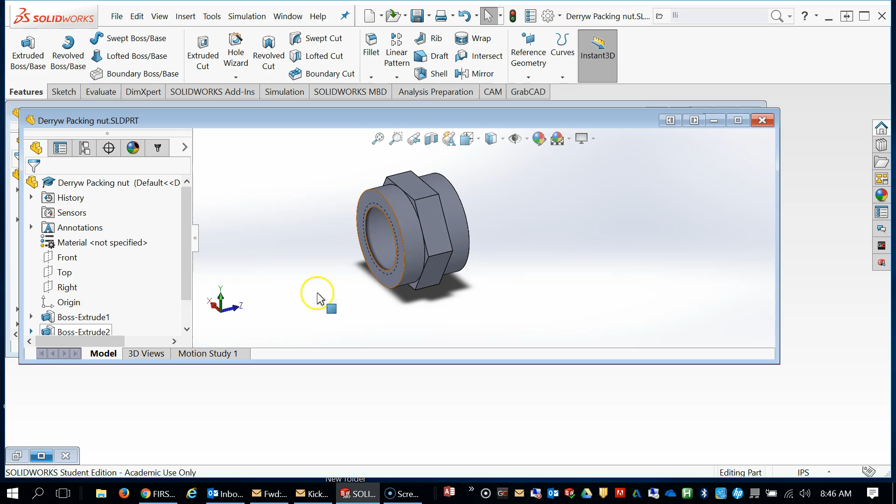But before we do so, I want to change the materials of our parts. So I have our part open here, and you'll notice that the material is not specified. We're going to right click here, go to Edit Material, and close up.

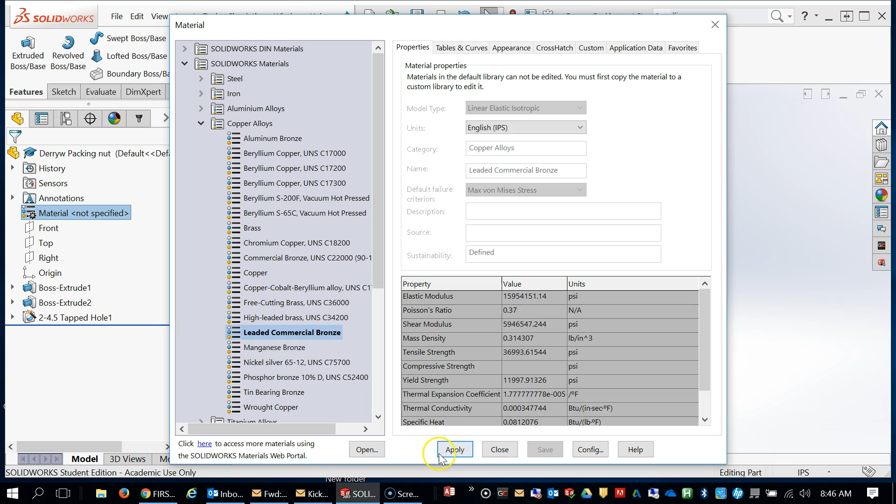Steel is probably open for you, the default. We're going to close that up and go to the copper alloys, and down here we're going to select leaded bronze. If you don't select the correct material, your mass properties are not going to match mine. So take a moment, make sure that you select leaded commercial bronze, and hit apply.

You'll notice that the color of your part changes. I'm going to go ahead and hit save and close this guy out. You'll see that I've already done that to the other parts. You're going to need to go through each of those parts and change them to leaded bronze.

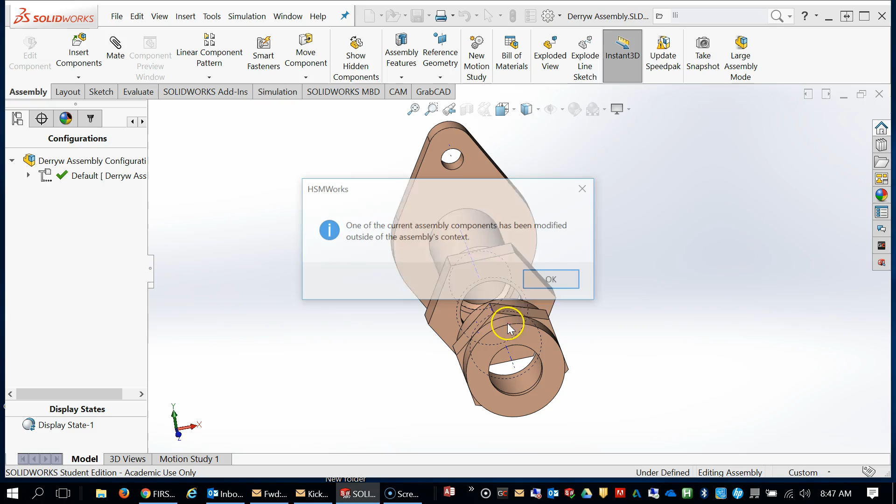I'm going to open up the assembly just so you see what happens. If there's been changes, you're going to need to hit rebuild, and it's going to make sure that all of your parts now have the correct properties.

So once we've changed the properties on our parts, we're ready to begin putting them on a sheet. We're going to go to New, select our midterm template. You're going to need to get that template. I'll set you up during class.

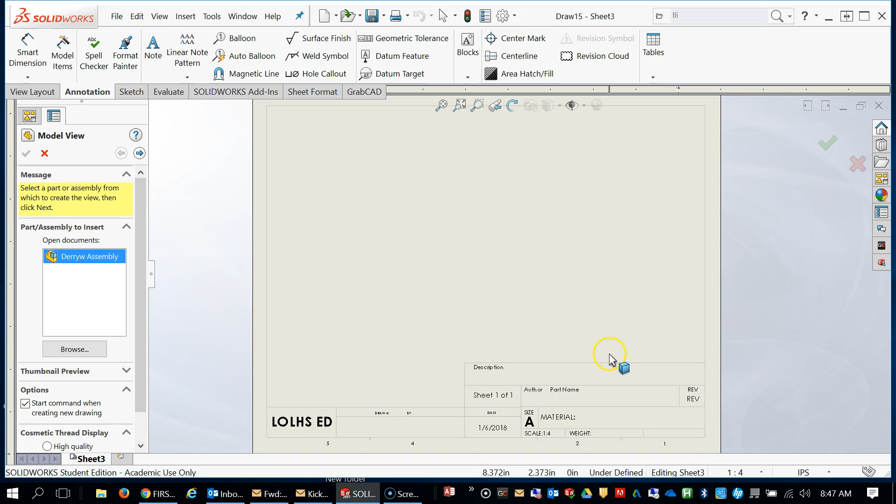I'm going to close this out because I like to use this method for pulling in our parts. It's easier to see what they're going to look like ahead of time. I'm going to go with the assembly first. We'll get a preview down here, and we're going to select the isometric view.

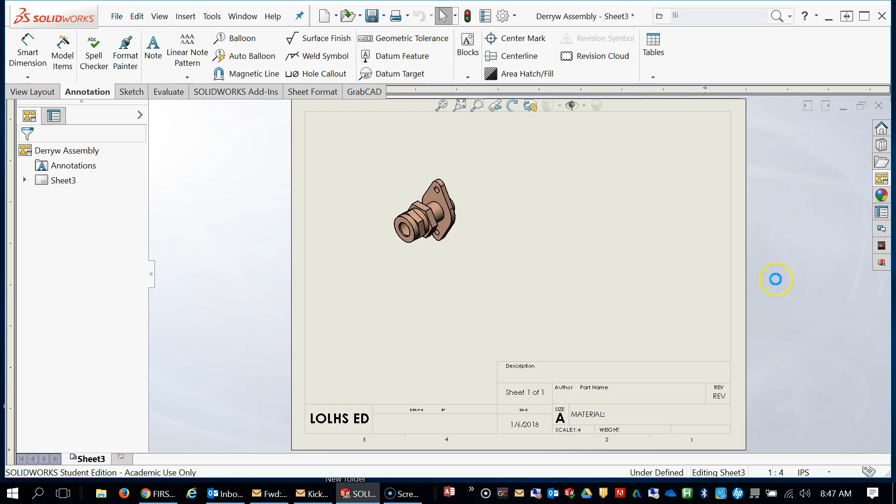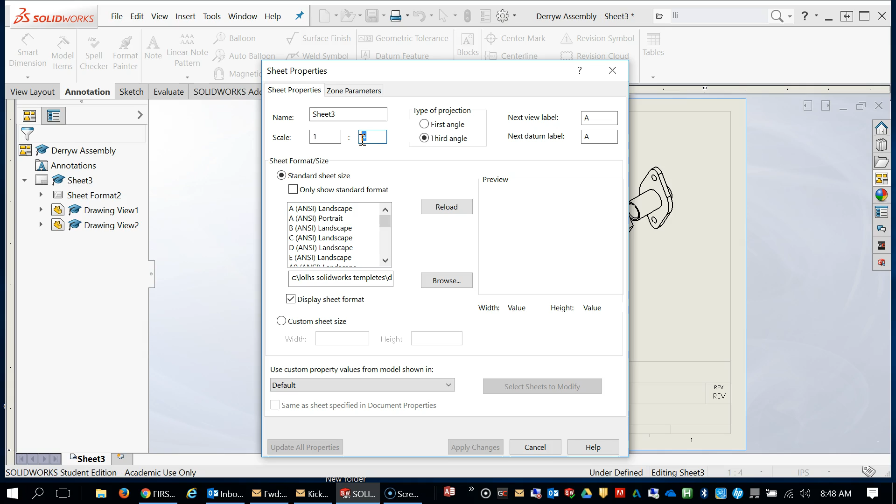I'm going to go back there and also pull in the exploded isometric view. Now I think this scale is a little small, so I'm going to right click on my sheet here, go to properties, and we'll make that a little bit bigger. So I'm going to go 1 to 2, and you'll see that both of these parts will scale up.

Okay, on our first sheet here, this says sheet 3, but really it's sheet 1. We are going to create a bill of materials and put some balloons on here so that we can identify the parts. So under annotation...

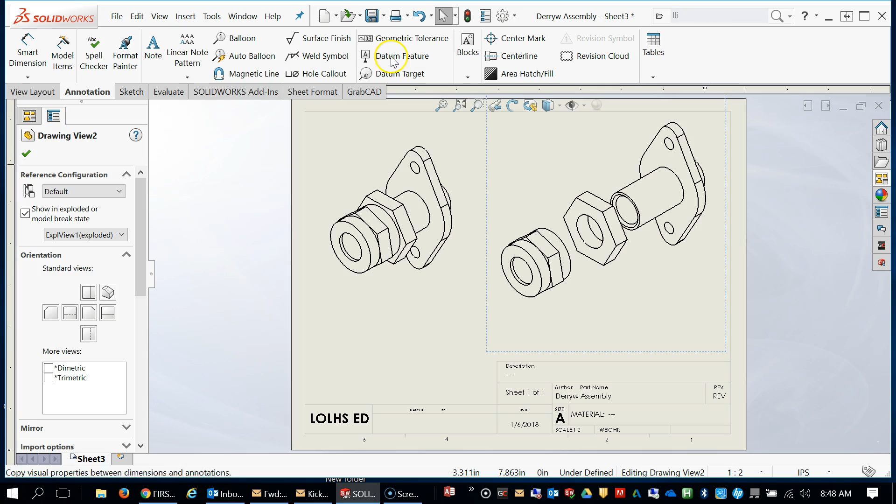We can go to tables and select a bill of materials. I have this view selected, and I'm going to hit OK, and it's going to generate my bill of materials, which I can set right in here.

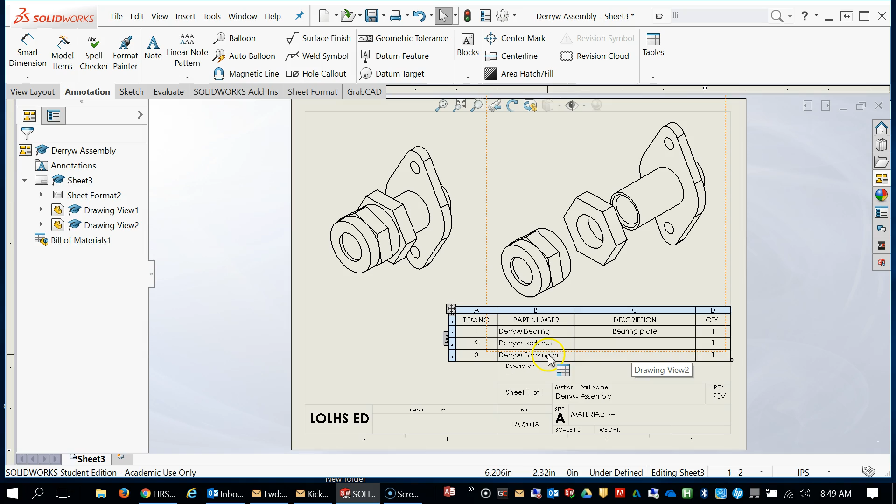You'll see that one of these has a description and the others do not yet. We'll take a look at how that happens in a bit. I want to put some balloons on here so that we can identify which one of these is the bearing, the lock nut, and the packing nut.

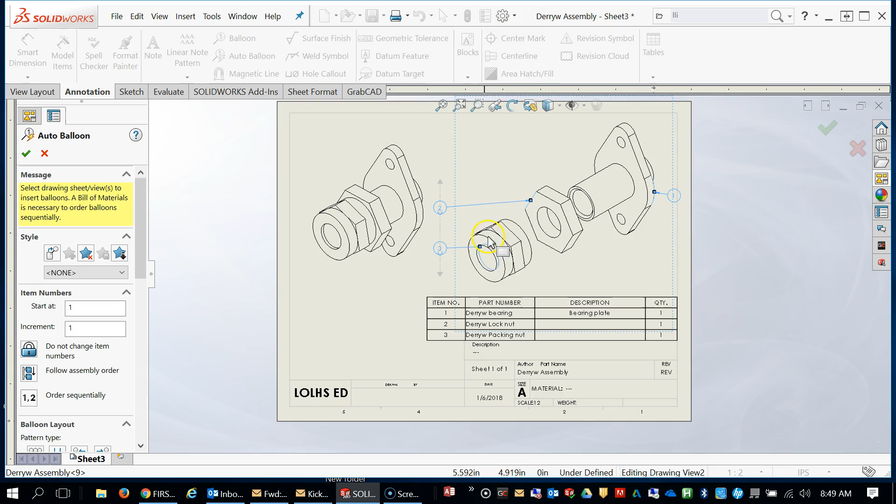So we're going to go to auto balloons and select this view, and SolidWorks will go ahead and put the balloons on there for us. Now if you don't like the location, you can just grab hold of one of these balloons and move them so that they're not off the sheet. You can bring that down to here.

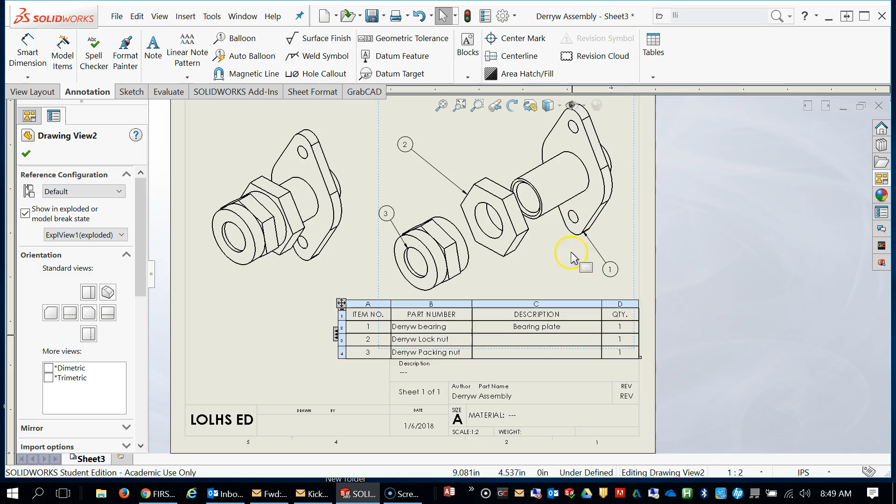Alright, so we should have our first sheet complete. Notice that the scale is already generated. The part name comes in because I saved this as the assembly, and a couple other pieces will get filled in as we do our other sheets.

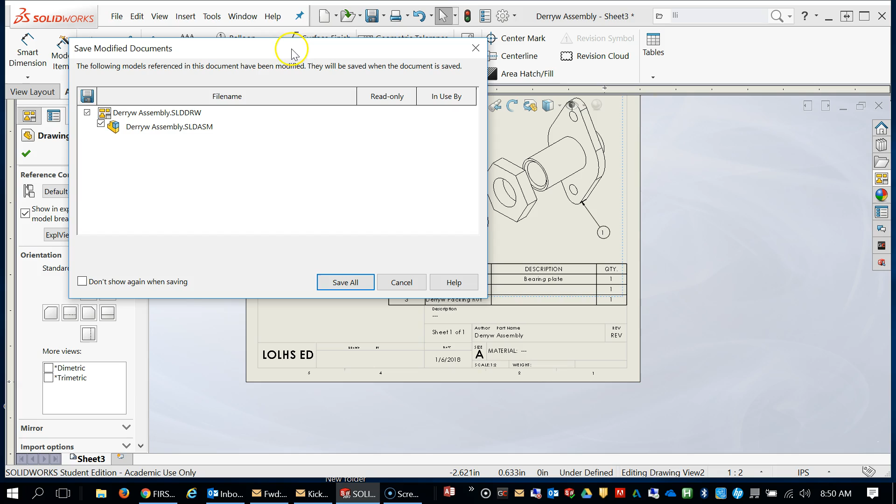I'm going to go ahead and save this so I don't lose my place. And you should be saving your work into your midterm review folder.

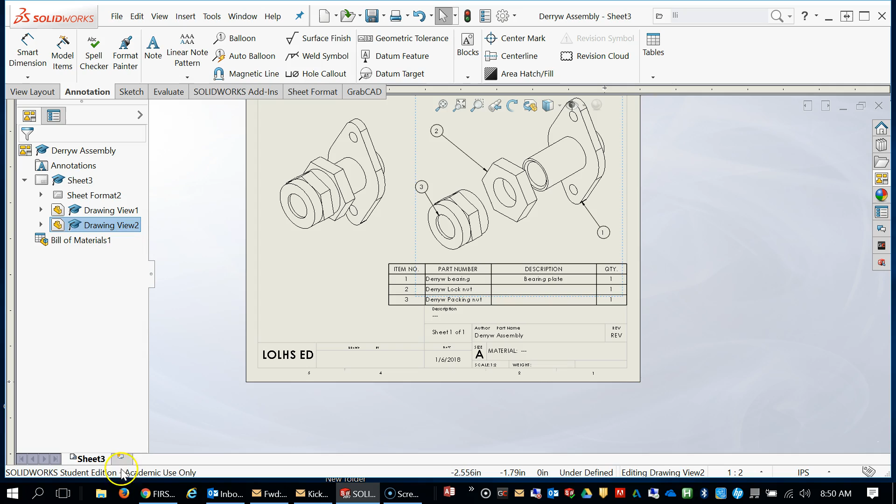Okay, we got to pull in another sheet, and we need to dimension each of these parts. I'm going to start with the simplest one, and then we'll work our way up to the bearing for the last one. To create a new sheet, we're just going to click down here, and it's going to launch another piece of paper. You'll see that now there's sheet 3. We can rename that so it's maybe less confusing. Yours is probably already called sheet 1. I'm going to make these match so it's less confusing.

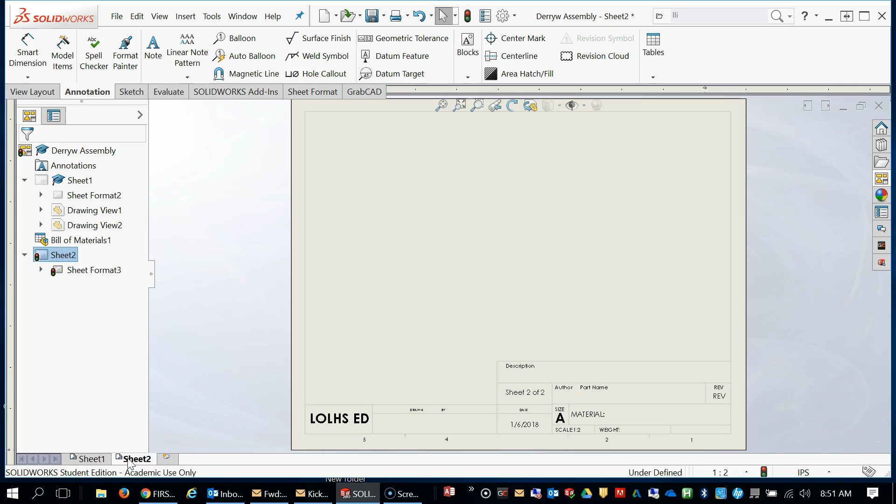So we have our first sheet. If I click back over here onto sheet 1, you'll see what we previously did, and sheet 2 we're going to now pull in the Locknut. So I'm going to go back over here and go to Browse, which should bring us right to our folder, and I'm going to select the Locknut.

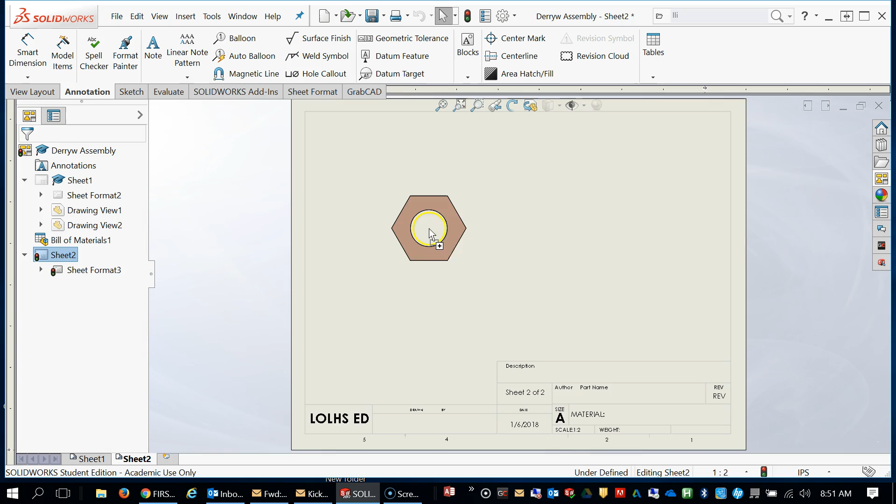Now we talked about which views make sense. In this case we're going to use this as our front view, just because SolidWorks has identified these as front, right, and top, that may or may not be what the view you want for the front view. Remember that SolidWorks generated this based on the plane that you drew for your sketches. So I'm going to go ahead and select this view, and while I have my cursor, without even clicking, I'm just going to drag to the right and create a right side view.

Now again, I think my scale is a little bit off, so I'm going to right click on this sheet and go to Properties, and I'm going to make this full size and hit OK, and now our Locknut is 1:1.

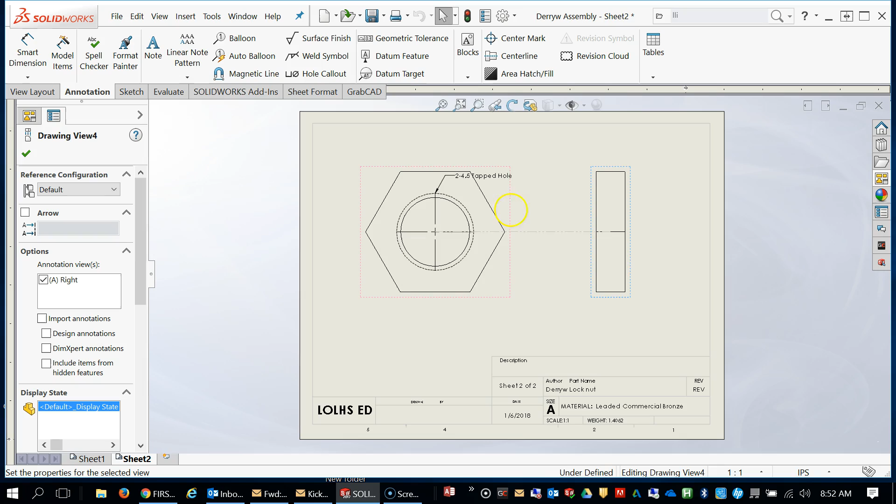Now SolidWorks has already put in this hole note, which is great, but I don't like the location because it breaks the rules. So we're going to go ahead and pull this over here, and I don't like that location. I'm going to put that, I like it like that. Go ahead and move this over, and that looks a little better.

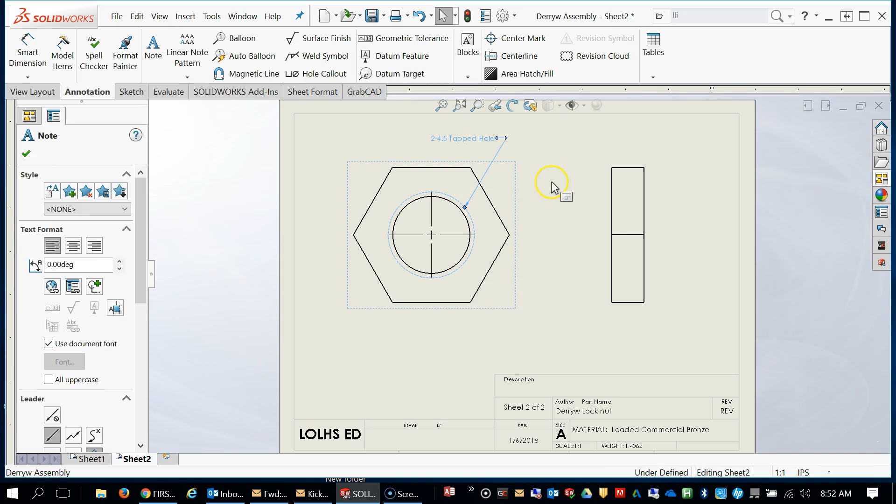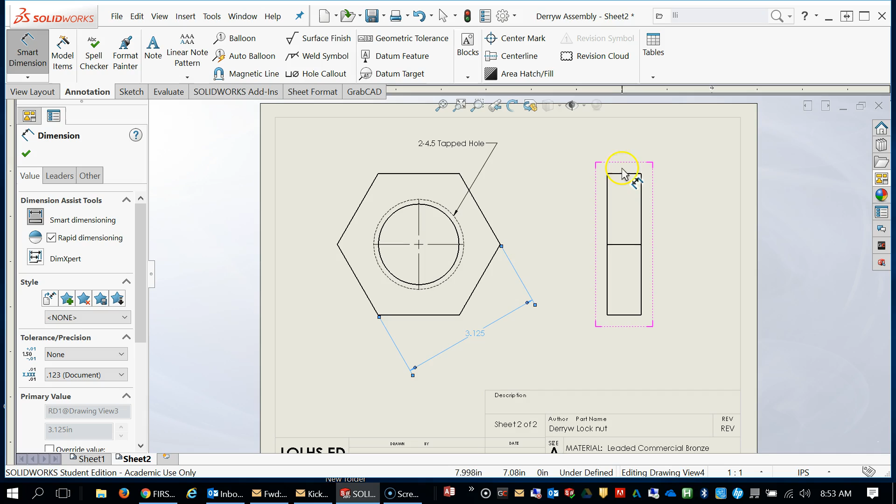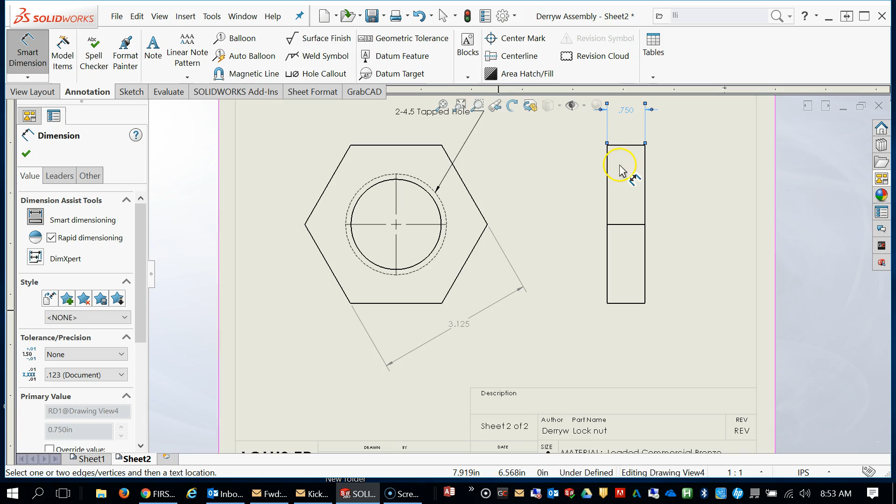Alright, so we have our hole identified as a 2-inch diameter with 4.5 threads per inch, so that's covered. We now need to identify our distance across the flats, so I'm going to grab my Smart Dimension and set that in, and then we just need one more dimension over here. So for this part, we can leave out all of these angles. It's identified as a nut, it's a hexagon, that's a given. And we just give our distance across the flats, our thickness, and our hole size, and we're good. So that's the easy one.

I'm going to add another sheet now and pull in our packing nut. So come over here, go to Browse, select the packing nut, hit Open, and it should populate here.

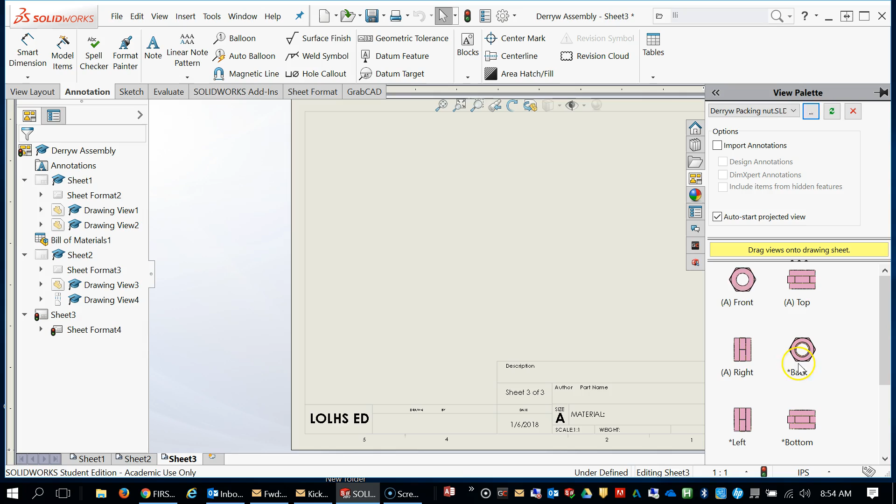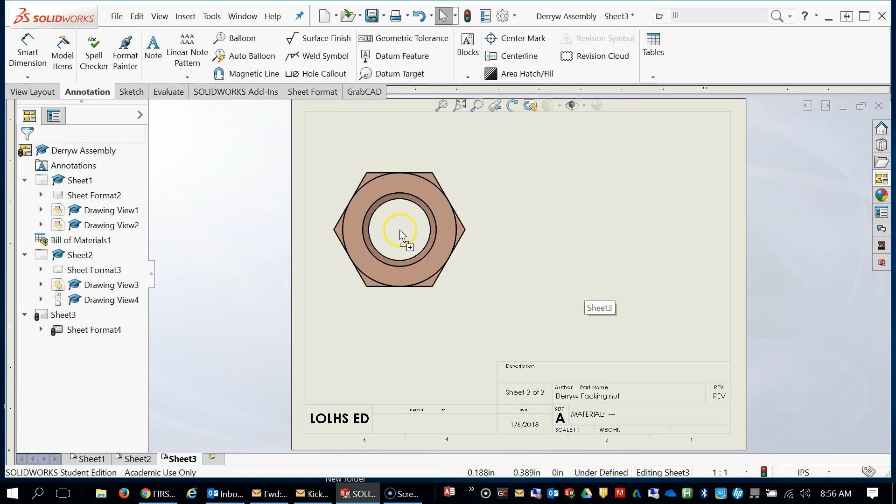Okay, in this case I'm not going to select the front view because the back view actually allows us to look into that packing nut, where the front view would be generating some hidden lines. So I'm going to pull the back as front view. You can see what I'm talking about right here. We're looking into that packing nut with the threads. And then we'll select this guy.

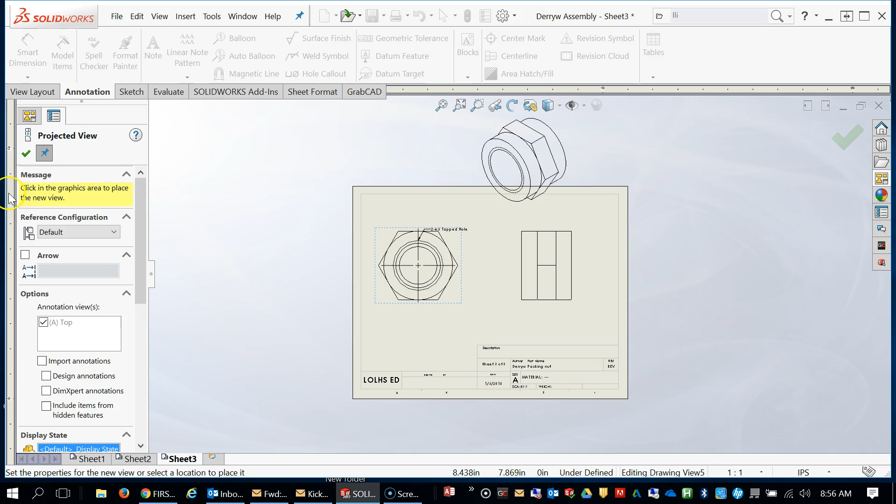We could put an isometric in for this view. Going to hit OK, pull these down, and I'm going to rescale this so it fits in. Shade it, go with custom scale, maybe 1:4. Let's see if we can go a little bit bigger than that. That should work.

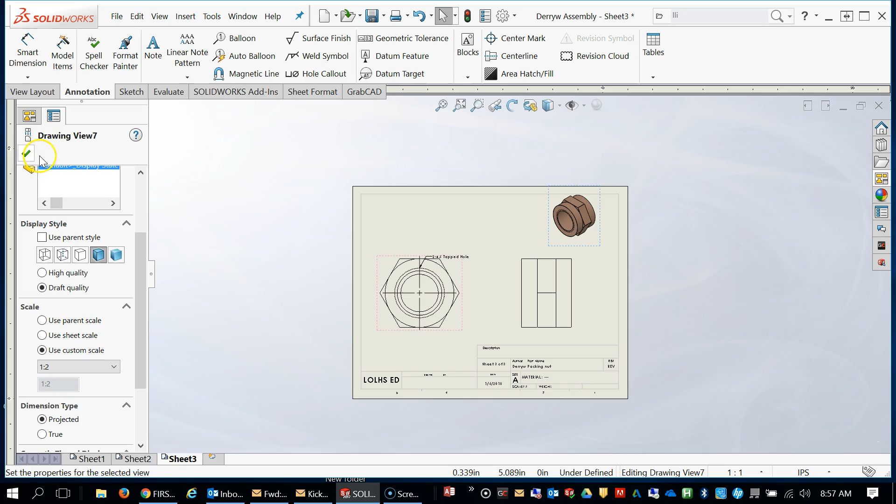Alright, again we want to move these around so that they follow our guidelines. In this case, there's a couple other features that we need to identify, and I'm going to cover that in our next video. So our next video is going to take us through finishing dimensioning this part and dimensioning the bearing plate.